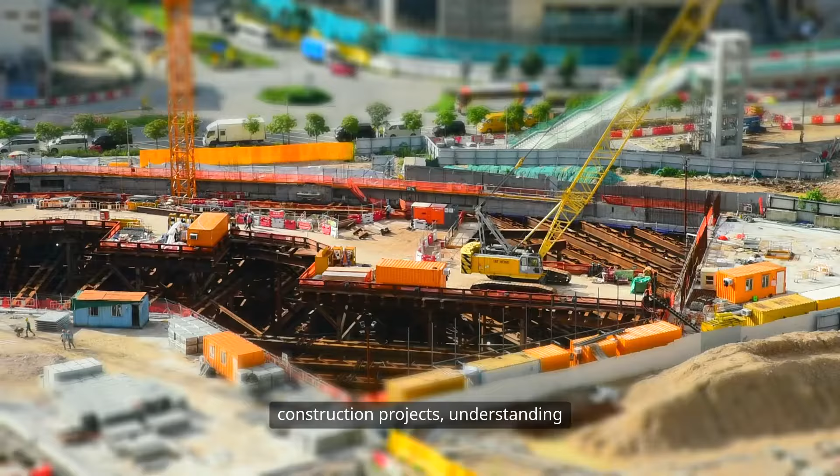As we navigate the complexities of construction projects, understanding risk management becomes paramount. From project initiation to design phases, a clear vision is crucial. Effective planning and execution not only enhance efficiency but also ensure that projects meet their objectives while adapting to uncertainties in a dynamic environment.

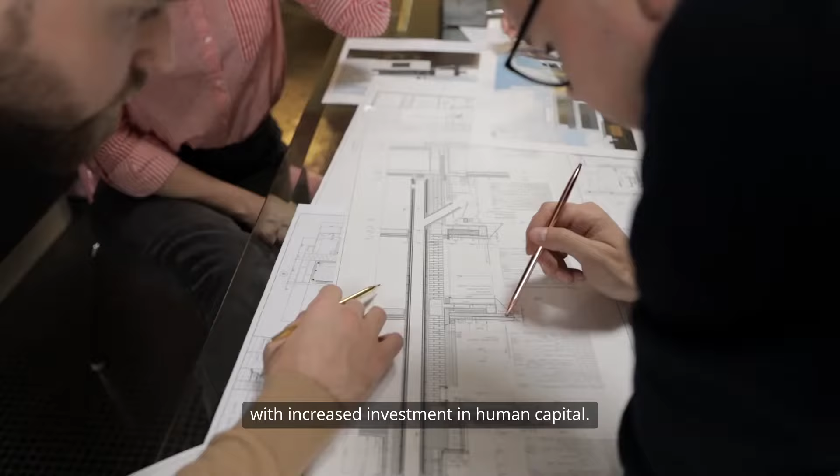An effective project manager must have technical knowledge and skills along with strategic planning. A project manager's knowledge and experience are considered important in determining project outcomes, and their performance will improve with increased investment in human capital. The results are significant because they confirm that the education and training of project managers in hard and soft skills are important in influencing the successful delivery of construction projects.

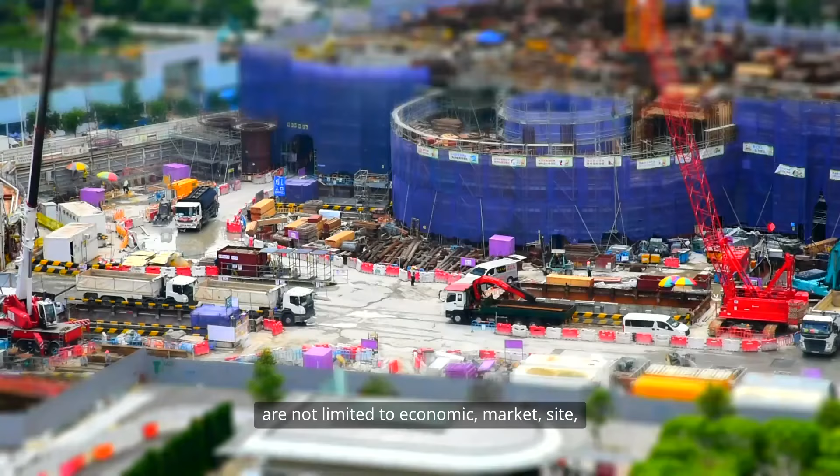Effective project management requires the ability to deal with uncertainty. Project risks run all along during a project's life cycle. These areas of risk mainly include, but are not limited to, economic, market, site, team, and technological uncertainties. In order to manage these risks effectively, skills such as risk identification to risk mitigation, involving various tools and techniques, are needed for the project manager.

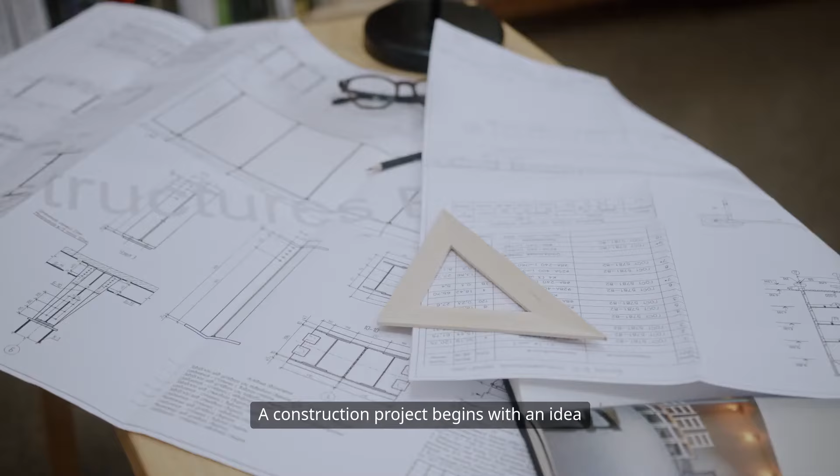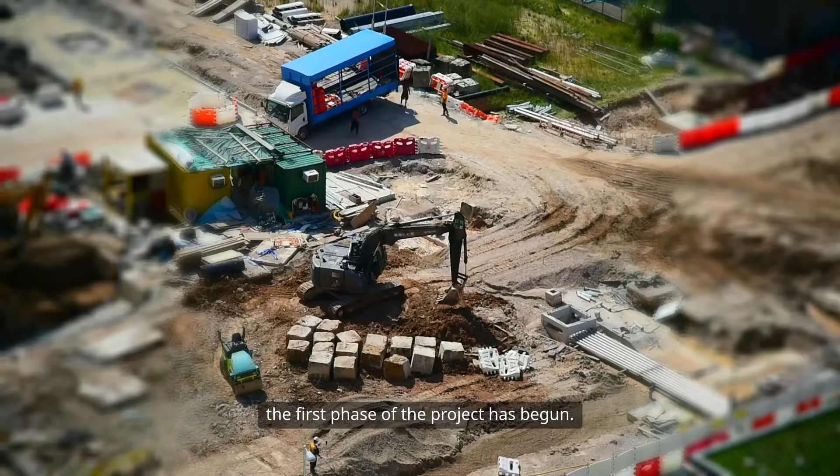Now I will talk about construction projects and key definitions. A construction project begins with an idea that is born due to a particular wish or need. Once the decision has been made by the owner to transform this idea into a reality, the first phase of the project has begun. During project initiation, the owner gives great consideration to the various parameters of the project, such as what is actually needed, the work required, and how financing may be obtained.

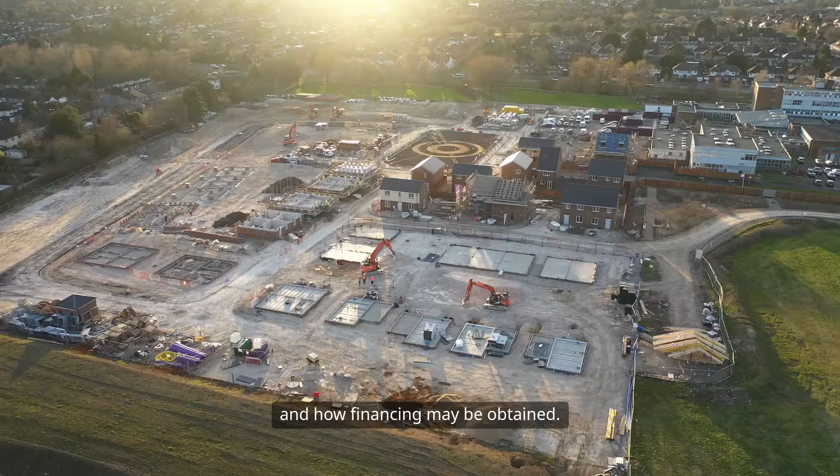The decision to build is a fundamental backbone to the aim and criteria of the project and is not to be taken lightly. By the end of this evaluation process, the owner should have a general but clear vision of the impending project. After this period of analysis, if the project still proves beneficial, the owner may decide to take the next step and hire design professionals to begin the design phase of the project.

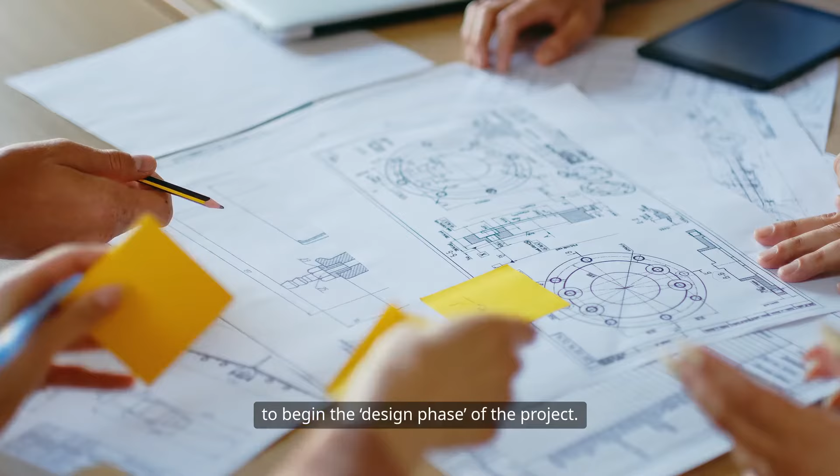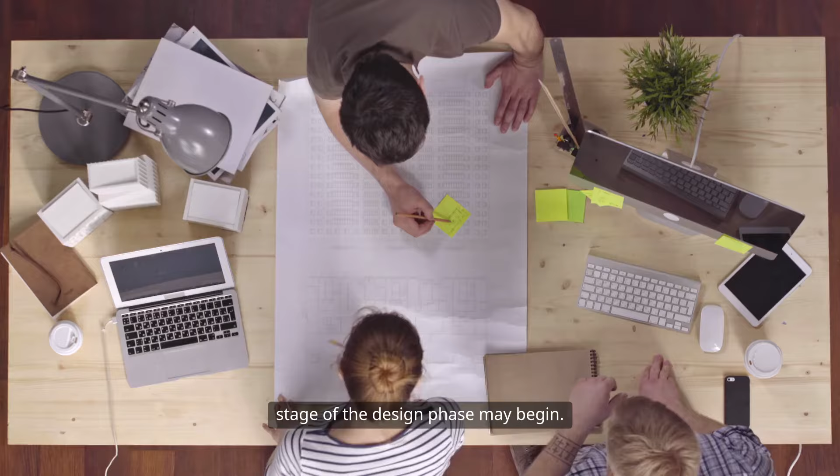Upon selection and evaluation of design professionals, the owner has now become the client, and the programming stage of the design phase may begin. During this process, the design professional's primary focus is to ascertain the needs and desires of the client. Programming also involves searching into the codes and regulations that will be applicable to the specific project.

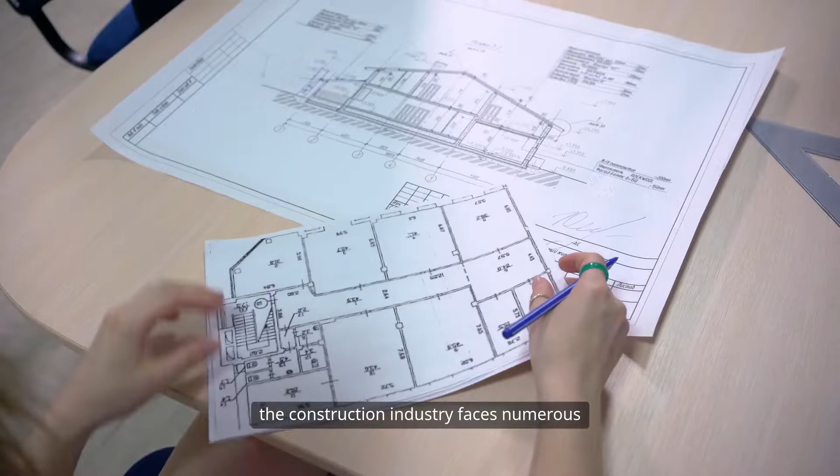Every organization sets strategies and ideas according to its product development and the nature of business to protect against various troubles. Especially the construction industry faces numerous troubles throughout the life cycle of the project, including initiation to handing over.

Conceptual framework: the development segment, or the construction segment, has persevered its sustenance through critical development accomplishment around a decent rate of the GDP. With the logically created rivalry among substantial and small-scale businesses, the planned division of these organizations began to give more noteworthy significance to arranging strategies, control of generation, and furthermore the nature of products and their respective services.

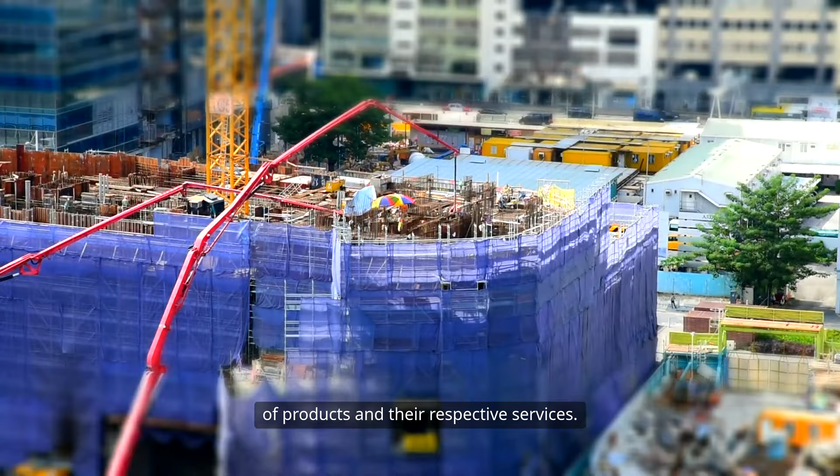The performances in the production control area have been demanding structural and behavioral changes in both production processes and administrative and management procedures as a way of achieving solutions to streamline processes, improve quality, and reduce the prices of products. It has become indispensable to the management of the resources used in a project, large or small.

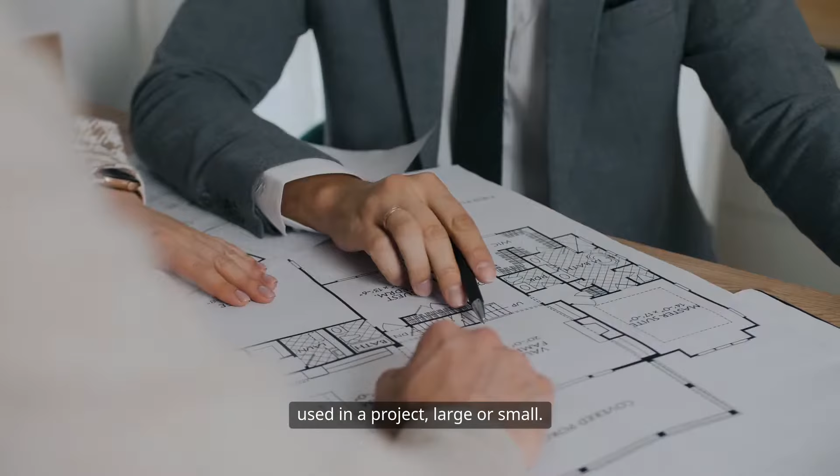In this context, the construction sector has strived to adapt the concepts, methods, and techniques developed for industrial production environments that are generally implemented through administrative procedures as well as planning and production control systems. However, concepts developed for the industrial environment cannot always be adapted to situations occurring in building construction, causing it to generate inappropriate low efficiency.

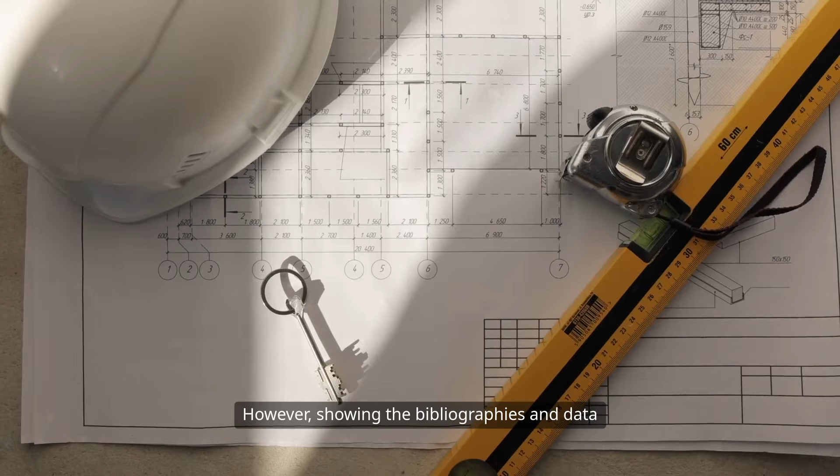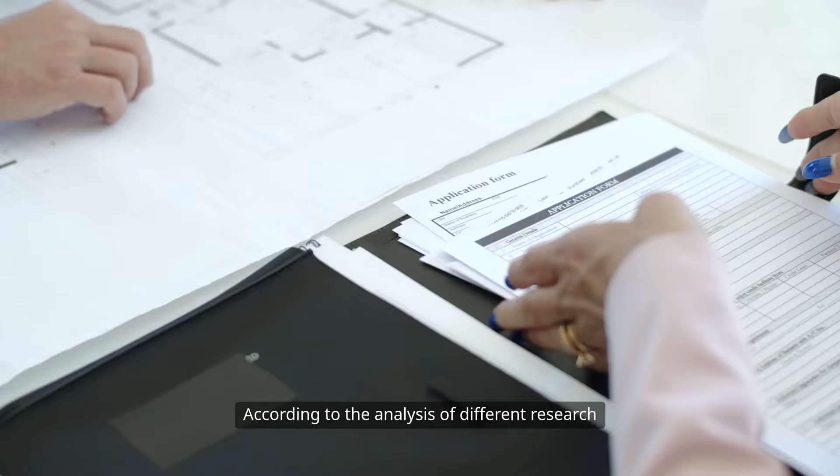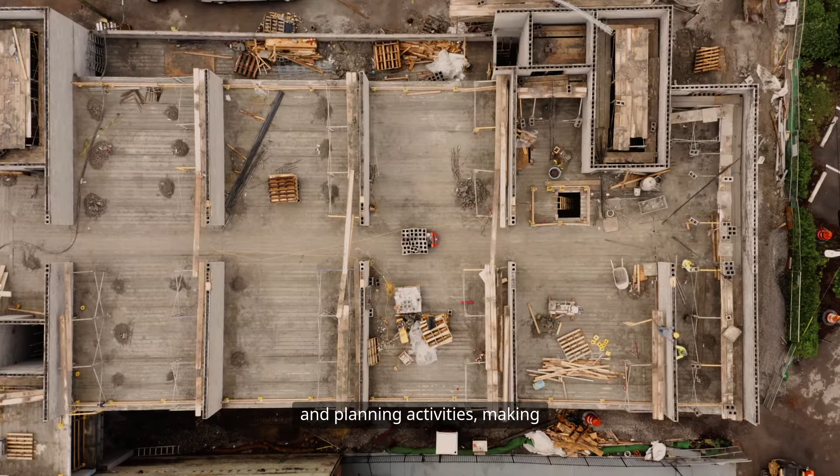However, showing the bibliographies and data on this subject, it is seen that professionals in the tactical and operational levels of these companies do not have the same vision and therefore do not give the same importance to the subject. According to the analysis of different research reports, it is observed that the professional management of building a solution will meet the expectations of project design and execution of the work in various aspects, such as technical feasibility of the project, managing the project, analysis of investment, and planning activities, making the work a profitable and promising business.

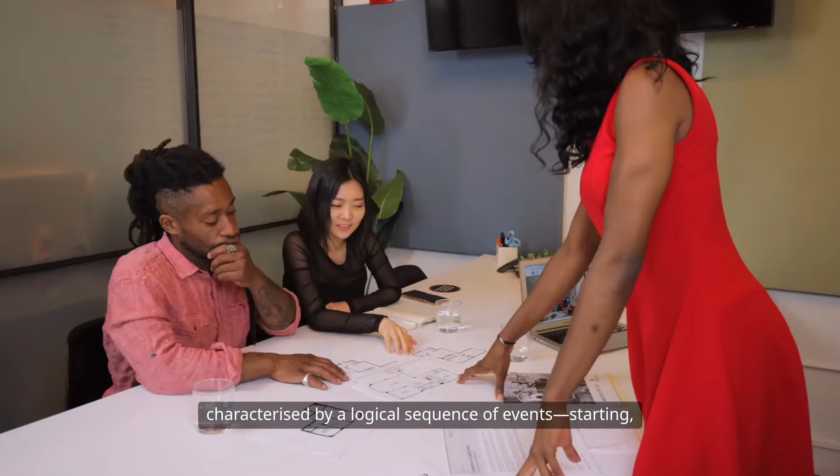In accordance with the social perspective, this sector is one of the largest job creators in the country and therefore deserves to be studied and researched to better efficiency. With regard to the construction industry, it is noted that there is a lack of training and information for professionals involved in project management. A project is a non-recurring development characterized by a logical sequence of events, starting, middle, and end, that is designed to achieve a clear and defined goal, being driven by people within predefined parameters of time,

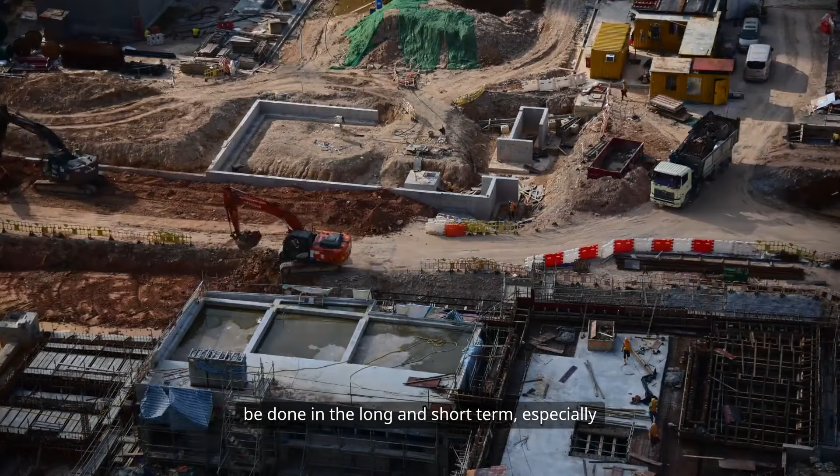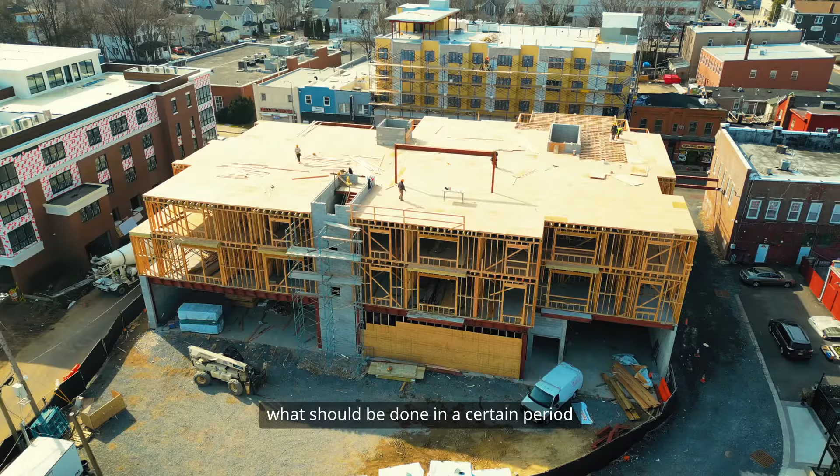cost, resources, and quality. This research is necessary to enhance and level the information between engineers and the master builder, who normally have difficulty in transmitting to their subordinates what should be done in the long and short term, especially when their orders are carried out verbally. After the initiation of the project, at the second level of planning, the engineer of the work, who is in possession of a macro schedule, reports verbally to his charge what should be done in a certain period of time, which usually is based on weeks.

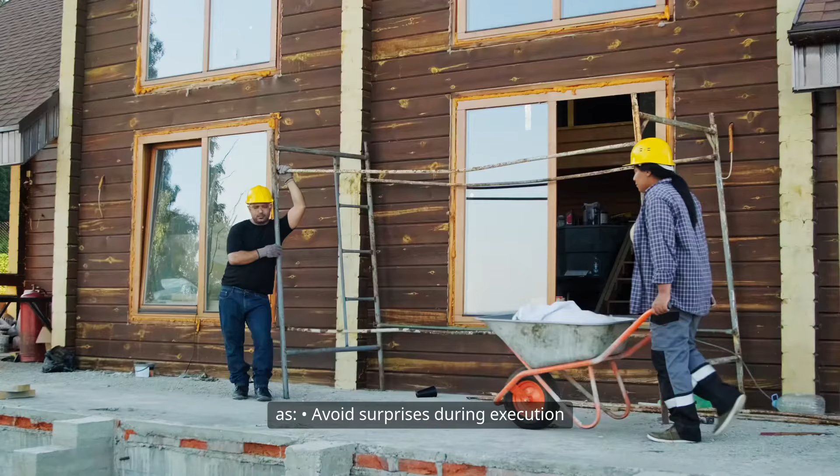Standardizing work plan and proper focus to business can improve the business. More professional practices with simple procedures from the team are also required to enhance the business. It is noticed that, with these procedures, it may be possible to achieve a better level in managing projects for construction companies. The main aspects that serve as an advantage in managing a project can be highlighted as: avoid surprises during execution, develop competitive advantages, anticipate unfavorable situations, speed up decisions if uncertainties are present, increase management control on the project.

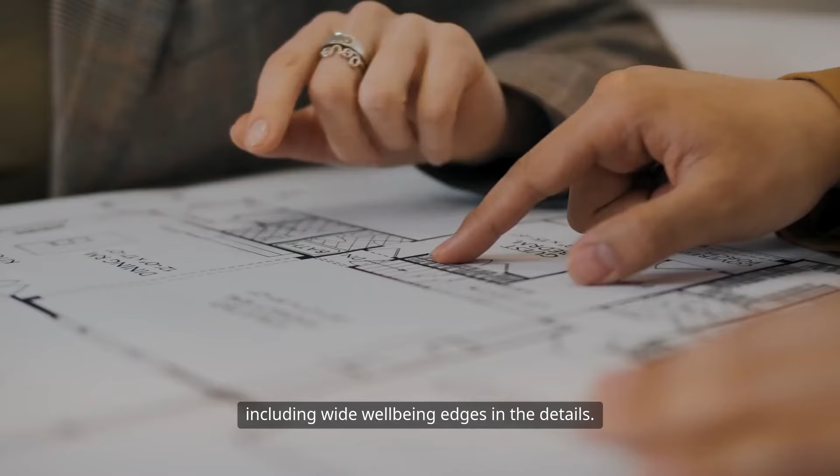Along these lines, a danger examination needs to be created by the building originator, brought about between the building planner and the temporary worker. Disappointment of the seal would be liable to bring about an unalterable breakdown. The planner should make up for any danger by including wide well-being edges in the details. For whatever length of time that the temporary worker regards those edges, execution would be considered safe. It can be done with an infusion spear that would convey fundamentally distinctive results if not infused precisely vertically into the ground. Therefore, contingency planning and precautions would enable the engineers to encounter any future damages or mishaps.

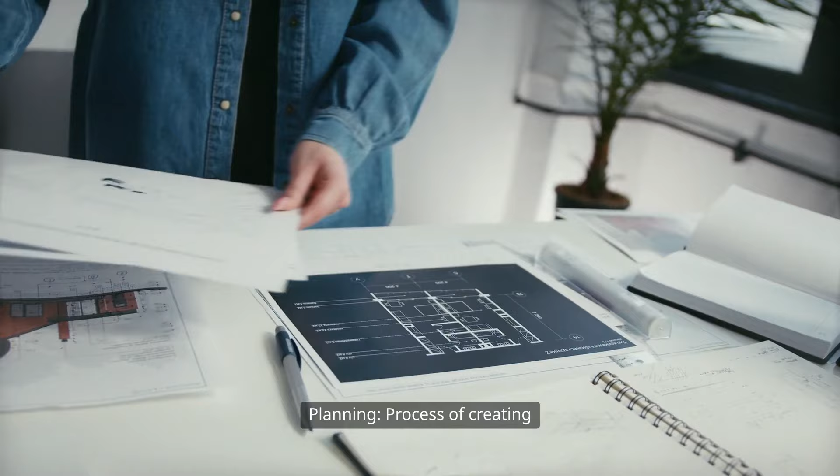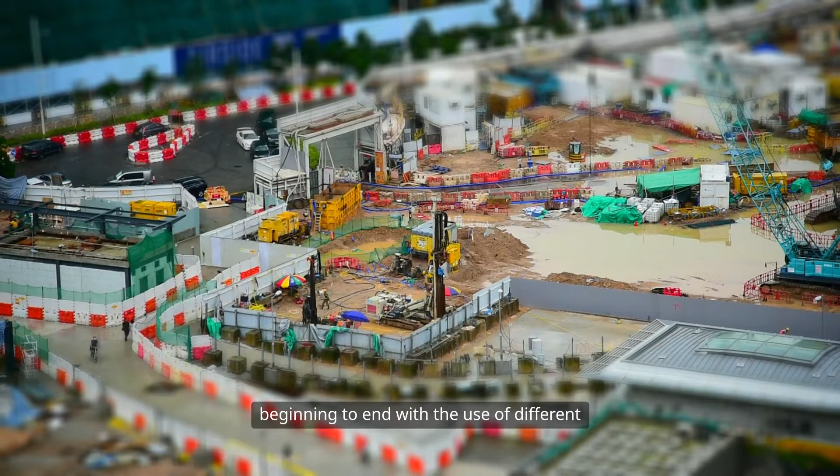Here are some key definitions. Construction, process of erecting an infrastructure on a larger perspective. Technical feasibility, easy to understand the complexities and technicalities. Planning, process of creating different techniques and methods to achieve certain objectives. Project management, a process in which the completion of a project is guided from beginning to end with the use of different techniques and strategies in order to maintain the aims and objectives towards the progress of a project.

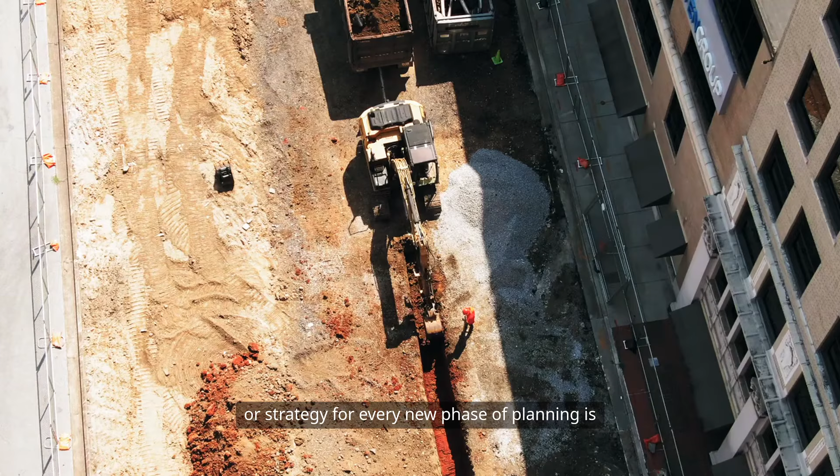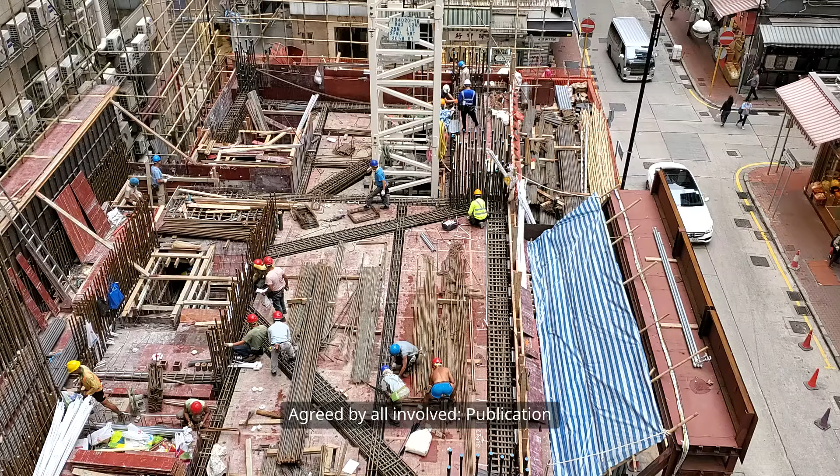Smart objectives. Specific, implementation of a specific plan or strategy for every new phase of planning is very important for any organization. Measurable, every organization should have step-by-step progress meter to judge its performance. Agreed by all involved, publication of specific product details, management overview, production demand, and future business every 3 months and in full in annual meetings with all employees. Realistic, making a realistic production plan can make employees happy. Time frame, implementation of proper production. Manufacturing, construction plan, careful consideration of internal and external risk for successful completion of manufacturing or supply within the time frame and budget.